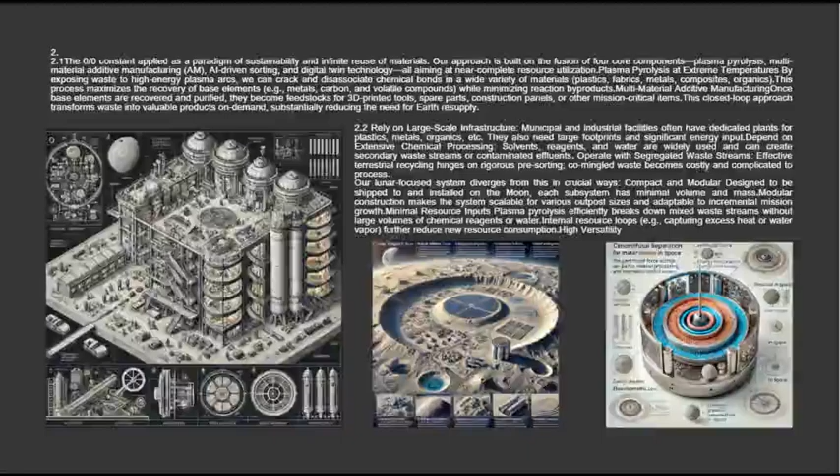terrestrial circular economies. In the long term, our zero/zero systems will revolutionize resource recovery by enabling scalability. Our modular design means that the system can be expanded or adapted to meet the needs of different missions, whether it's for a small lunar settlement or large-scale Earth-based recycling facilities.

Adaptability. The core technologies, advanced recycling, digital twin simulations, and AI-driven process optimization, can be tailored for various environments, ensuring efficient operation under extreme conditions, from the lunar surface to urban industrial settings.

Sustainability. By achieving nearly 100% material recovery and converting waste into valuable feedstocks and energy, our system reduces dependency on external resources and minimizes environmental impact.

Looking ahead, we are actively pursuing strategic partnerships with academic institutions, industry leaders, and government agencies. For instance, our collaboration with the University of Alabama will not only strengthen our research capabilities but also open up extended research opportunities, providing a robust platform for further innovation.

These partnerships will drive the continuous improvement of our recycling processes and support large-scale pilot projects on Earth, fostering sustainable practices that benefit communities and ecosystems.

Moreover, our solution has significant implications for both space exploration and Earth's environment. In space, it will enable self-sustaining habitats that reduce logistical constraints and support long-duration missions. On Earth, the technology can be adapted to manage municipal and industrial waste more effectively, promote energy efficiency, and create resilient, circular economies that conserve resources for future generations.

As we conclude, I want to reiterate that our zero-zero systems represent more than just a recycling solution. They embody a paradigm shift in how we view resource recovery and sustainability. By turning every fraction of waste into a valuable resource, we are setting the stage for a future where human ingenuity meets environmental stewardship in a truly transformative way.

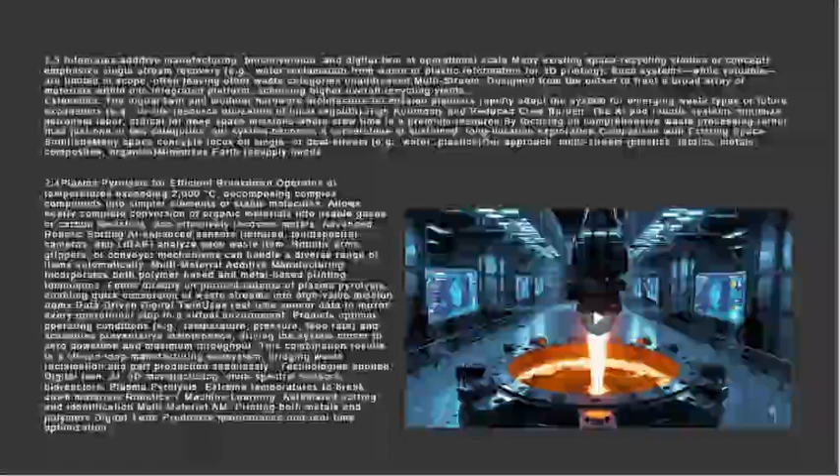Phase 1, Material Testing, months 1 to 6. During the first 6 months, our focus is on material testing and subsystem validation under simulated lunar conditions. Our key objectives are finalizing detailed CAD models and complete assembly drawings, conducting simulation analyses, finite element analysis, thermal modeling, to optimize design parameters, prototyping key subsystems, such as the bioreactor, thermal depolymerization reactor, and separation system, using Earth-based simulants.

Our success criteria for Phase 1 include achieving recycling efficiency targets of 99% or greater, maintaining system reliability with at least 95% uptime, and validating energy recovery that confirms our closed-loop concept.

Phase 2, Prototype Development, months 7 to 12. In Phase 2, we develop a fully integrated prototype. Our goals are fabricating custom components, advanced shredders, separation modules, and procuring off-the-shelf items, sensors, controllers.

Integrating individual modules, pre-sorting, fragmentation, separation, conversion, and energy recovery into a cohesive system in a laboratory environment. Conducting rigorous tests under simulated lunar conditions, vacuum, extreme temperatures, to ensure system coherence. Optimizing interfaces between modules to ensure smooth material flow and maximal energy efficiency.

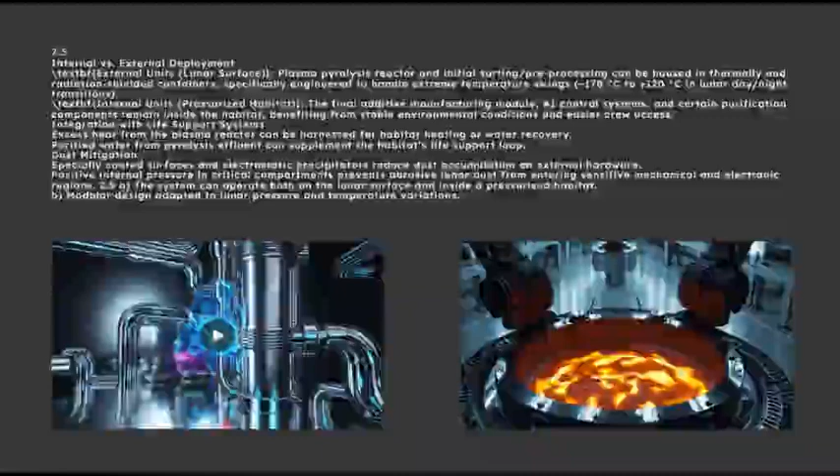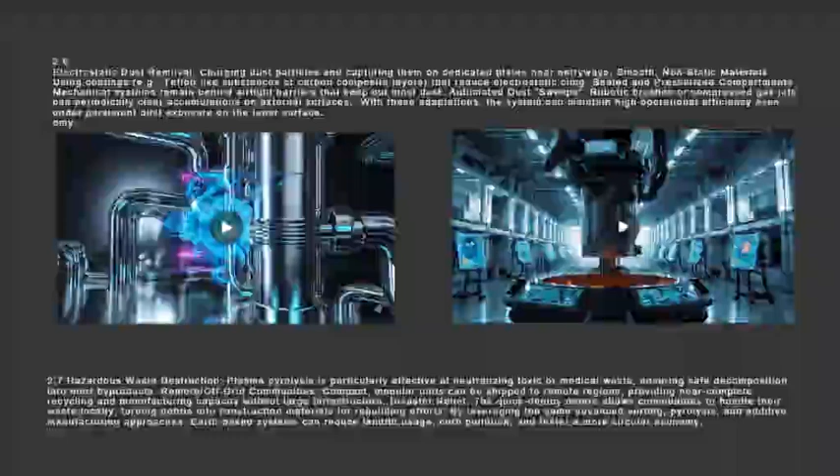Phase 3, full system testing and lunar deployment, months 13 to 24. Phase 3 involves full system testing and preparing for potential lunar deployment. Assembling a field-ready prototype designed to operate in a simulated lunar environment. Conducting extended tests in thermal vacuum chambers to simulate lunar conditions and monitor full-cycle performance over prolonged periods.

Documenting performance data, including recycling efficiency, energy balance, and system uptime, and refining our design accordingly. Developing a deployment strategy that outlines logistics, integration with lunar habitats, and operational plans.

Risk assessment and mitigation. We have identified key risks along with mitigation strategies. Thermal failure in reactors, high: use advanced heat-resistant materials and optimized cooling systems. Energy inefficiency, medium: optimized solar arrays, incorporate redundant energy storage, and apply adaptive control algorithms.

Integration of advanced modules, high: conduct thorough interface reviews, use standardized modular interfaces, and perform incremental integration tests. Component fabrication delays, medium: partner with multiple suppliers, include contingency time, and employ rapid prototyping.

System reliability under extreme conditions, medium: utilize thermal vacuum chambers for testing and simulate conditions using our digital twin. Crew interface and safety, medium: develop comprehensive SOPs, implement remote monitoring, and conduct regular training drills. Budget overruns, medium: allocate a contingency budget of 15 to 20% and secure additional funding through partnerships and grants.

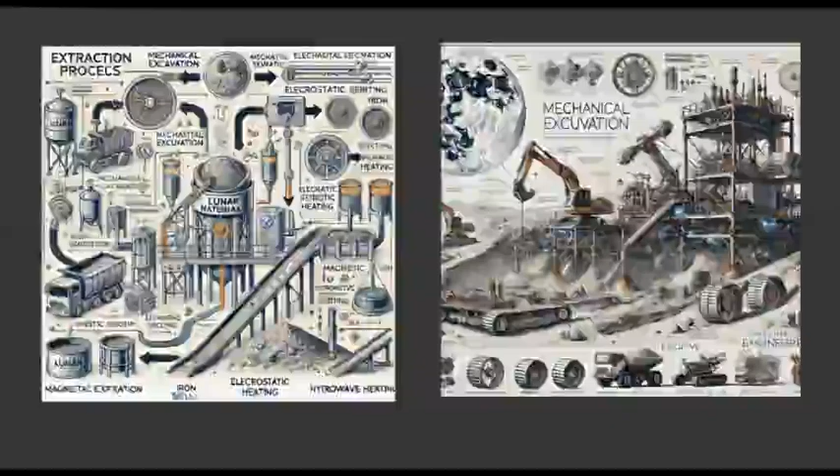Our digital twin and control system is the nerve center that provides real-time monitoring and adaptive control through AI-driven optimization. With a mass of around 100 kilograms and a volume of about 800,000 cubic centimeters, this system operates within 0 degrees Celsius to 50 degrees Celsius and 90 to 110 kilopascals. It dynamically adjusts processing parameters to ensure maximum efficiency across all modules.

Finally, the auxiliary systems, which include conveyors, safety enclosures, sensor mounts, and access panels, support material handling and facilitate maintenance. These systems weigh approximately 150 kilograms and occupy about 1 million cubic centimeters, operating under the same environmental conditions as the rest of the system. They enable easy modular integration and ensure that maintenance can be performed quickly, keeping the overall system operating seamlessly.

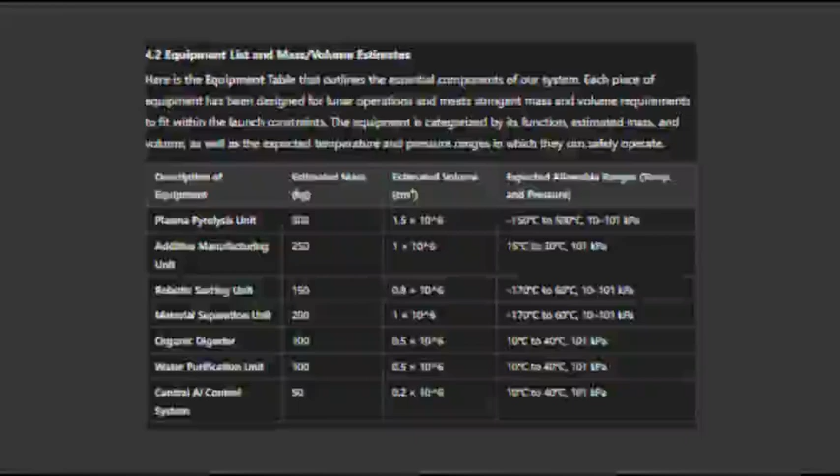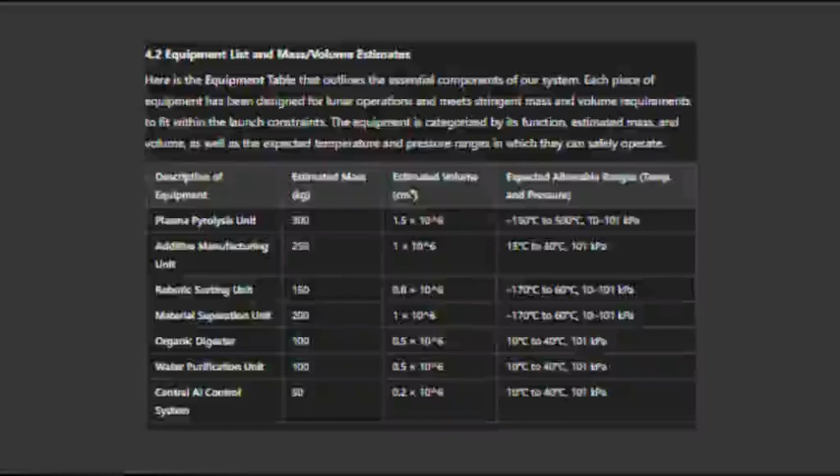In summary, our detailed CAD models, comprehensive equipment specifications, and modular design collectively ensure that every component supports our 0/0 system, where no resource is wasted. This robust hardware foundation is essential for creating a sustainable, self-sufficient lunar habitat.

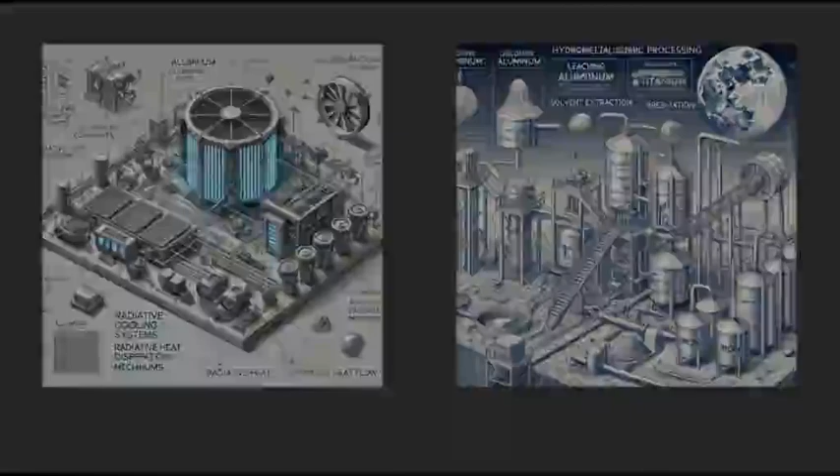Preliminary CAD models and key dimensions. Our CAD models provide an assembly-level view of the entire system. These models illustrate the spatial arrangement of our major modules: pre-sorting and identification unit, fragmentation and shredding module, separation and purification module, conversion and manufacturing module, energy recovery module, digital twin and control system. Each module is designed with precise dimensions to optimize space utilization and ensure smooth integration.

Walkthrough of the equipment list. Let's now review our equipment list, where we detail each major component's function, mass, volume, operating conditions, and integration features. Pre-sorting unit. Function: automates waste intake and material identification using sensors, XRF, Raman, and vision systems. Mass: approximately 150 kilograms. Volume: about 1,200,000 cubic centimeters.

Operating conditions: designed to operate within 0 degrees Celsius to 50 degrees Celsius and 90 to 110 kilopascals, fitting the controlled habitat environment. Integration: calibrated to reprocess 100% of incoming waste, which is crucial for maintaining our closed-loop 0 divided by 0 system.

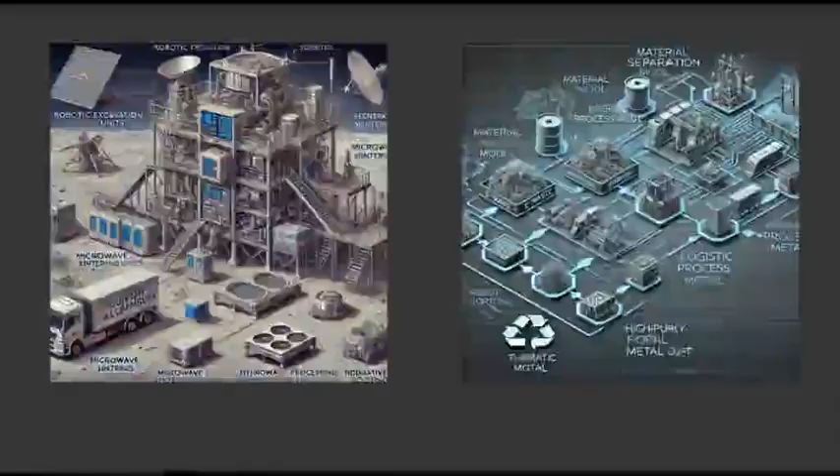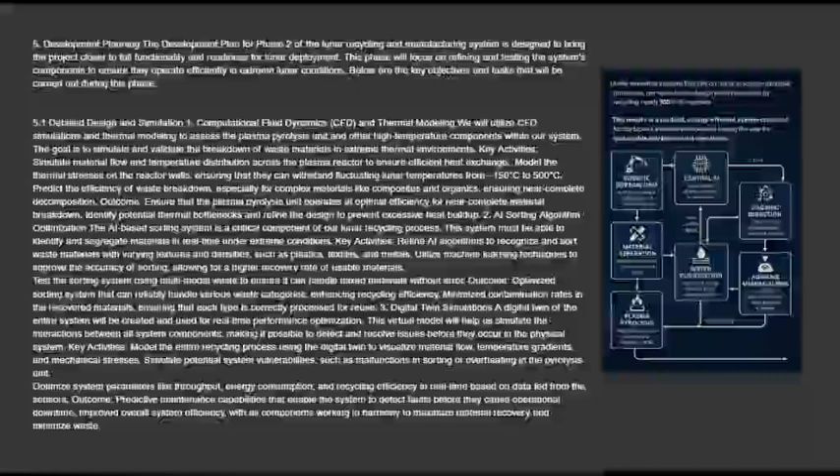Fragmentation and shredding module. Function: reduces waste to uniform particle sizes using high-torque shredders with carbide-tipped blades and vibratory screens. Mass: approximately 200 kilograms. Volume: around 1,800,000 cubic centimeters. Operating conditions: operates between 0 degrees Celsius and 60 degrees Celsius at 90 to 110 kilopascals, ensuring robust performance under varying conditions. Integration: provides consistent particle size, maximizing efficiency in downstream processes.

Separation and purification module. Function isolates different materials using magnetic separators, centrifugal systems, and multi-stage filtration. Mass approximately 300 kilograms, volume about 2,500,000 cubic centimeters. Operating conditions maintain a temperature range of 0 to 50 degrees Celsius and a pressure of 90 to 110 kilopascals. Integration: advanced purification reintroduces residuals back into the process, supporting full resource recovery.

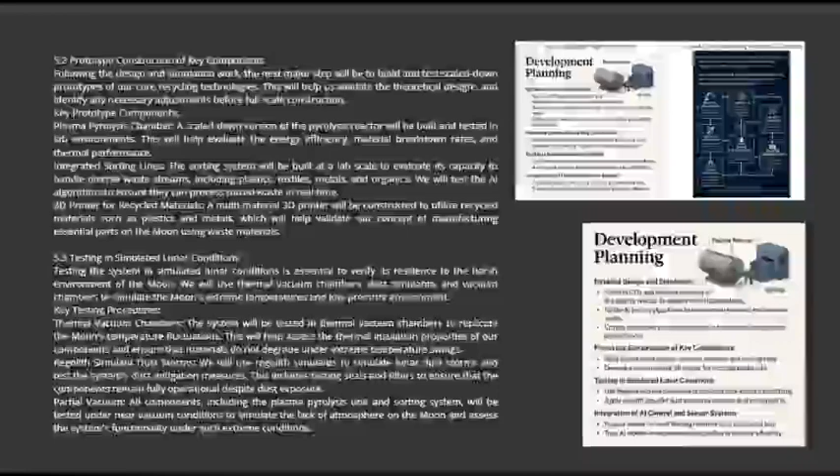Conversion and manufacturing module. Function transforms sorted waste into recycled pellets, ingots, or other feedstocks through processes such as extrusion, pyrolysis, and electrorefining. Mass approximately 350 kilograms, volume about 2,800,000 cubic centimeters. Operating conditions: the external housing operates between 0 and 50 degrees Celsius, while internal processing zones can reach up to 500 degrees Celsius with localized cooling and insulation. Integration: configured for near-zero byproduct loss, ensuring every output is reprocessed.

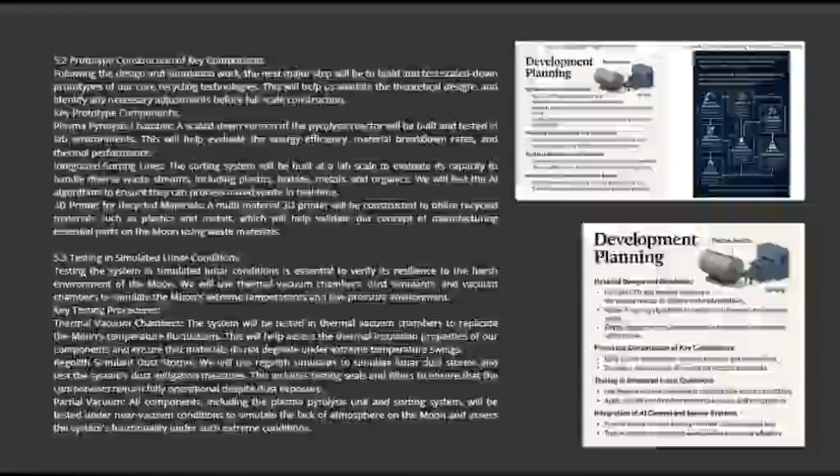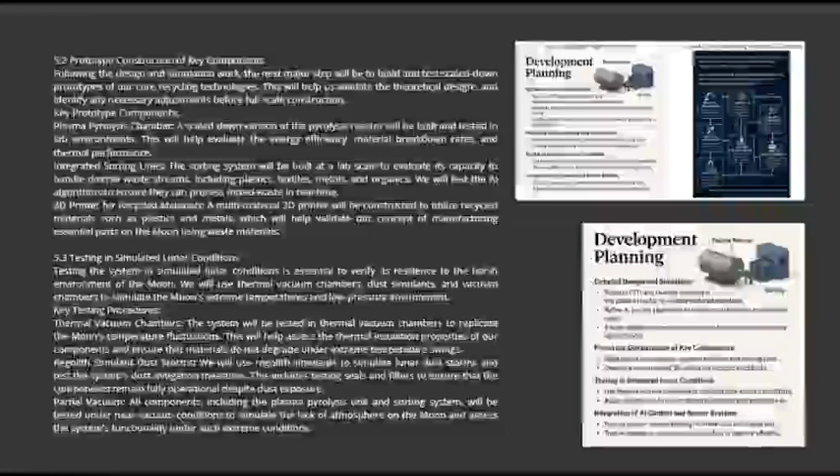Energy recovery module. Function captures residual thermal and chemical energy from processed byproducts and converts it to electrical power. Mass approximately 250 kilograms, volume around 1,500,000 cubic centimeters. Operating conditions: operates within 0 to 50 degrees Celsius at 90 to 110 kilopascals. Integration: reuses waste energy to support continuous operation, essential for a self-sustaining system.

Digital twin and control system. Function provides real-time monitoring and adaptive control via AI-driven optimization. Mass approximately 100 kilograms, volume about 800,000 cubic centimeters. Operating conditions designed for 0 to 50 degrees Celsius and 90 to 110 kilopascals. Integration ensures continuous adaptation of processing parameters to maintain efficiency.

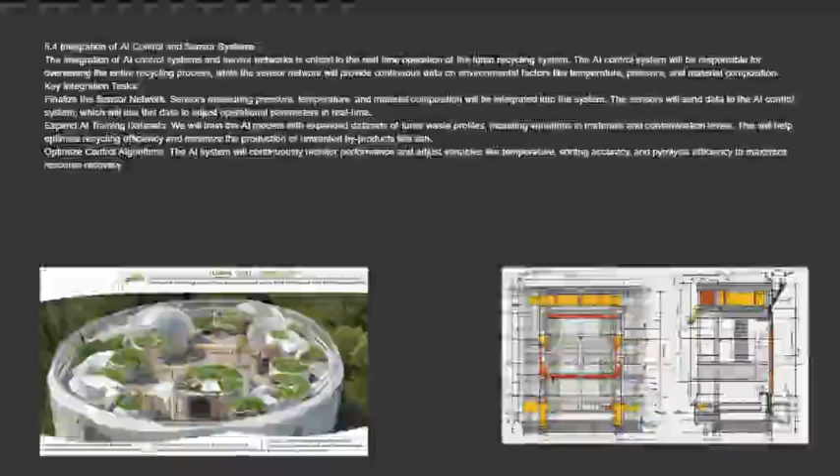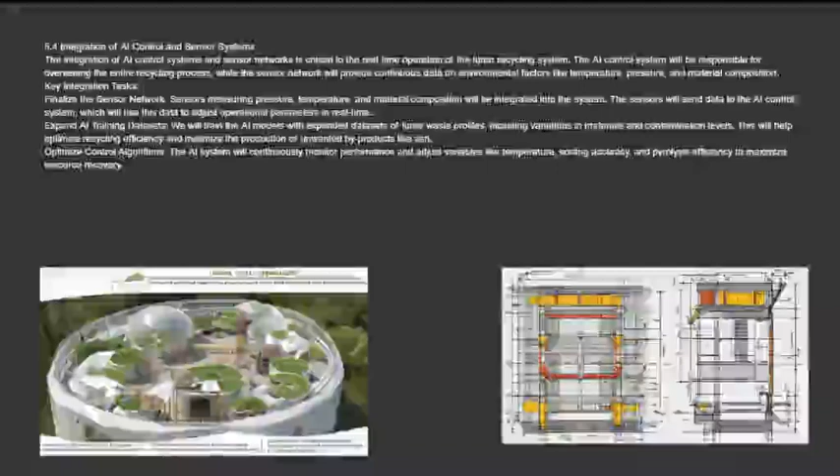Auxiliary systems. Function includes conveyors, safety enclosures, sensor mounts, and access panels to support material handling and maintenance. Mass approximately 150 kilograms, volume around 1 million cubic centimeters. Operating conditions operate within 0 to 50 degrees Celsius and 90 to 110 kilopascals. Integration facilitates modular integration and quick maintenance, ensuring overall system continuity.

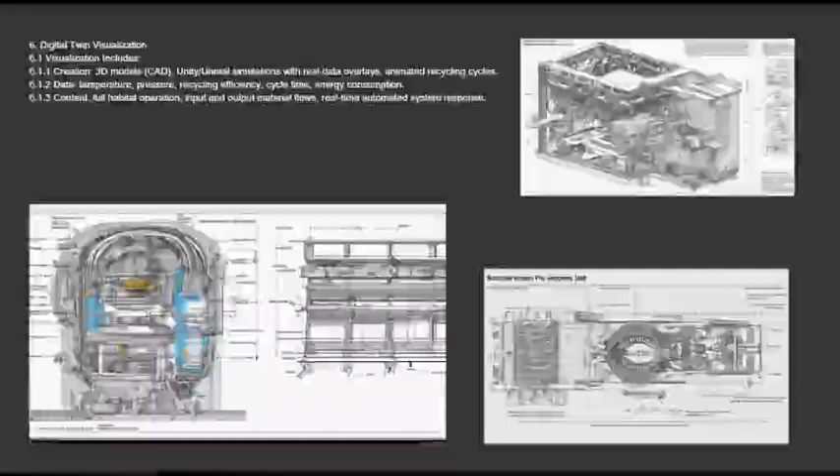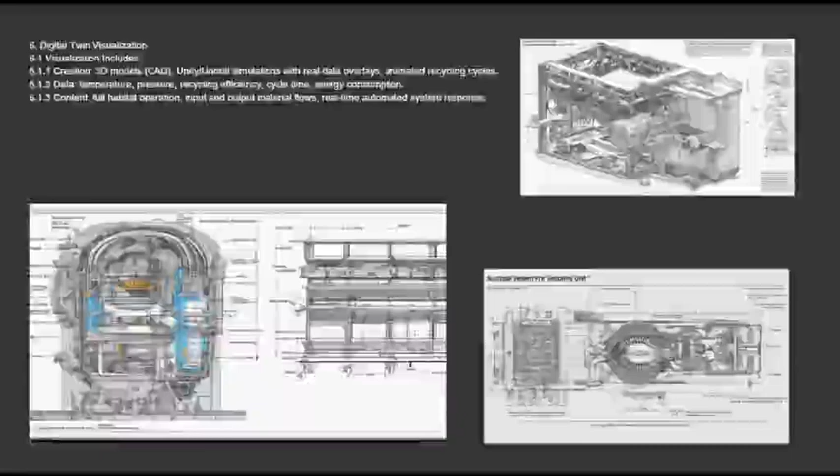Every component in our system is designed with the 0 divided by 0 principle in mind, ensuring zero waste and full resource recovery. Our design ensures that every fraction of material, even the smallest residue, is captured and reprocessed. The energy recovery module converts residual heat and chemical energy back into usable power. All modules are interconnected through our digital twin system, which dynamically monitors and adjusts operating conditions to optimize resource recovery.

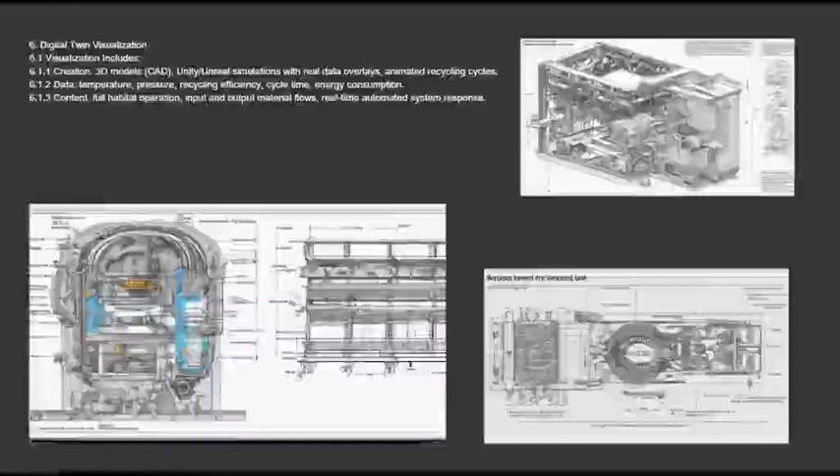In summary, our hardware and components are engineered for maximum efficiency, reliability, and adaptability under lunar conditions. The detailed CAD models, comprehensive equipment specifications, and modular design not only maximize material recovery but also embody our zero-waste philosophy, ensuring every bit of waste is repurposed. This approach is critical to creating a sustainable, self-sustaining lunar habitat.

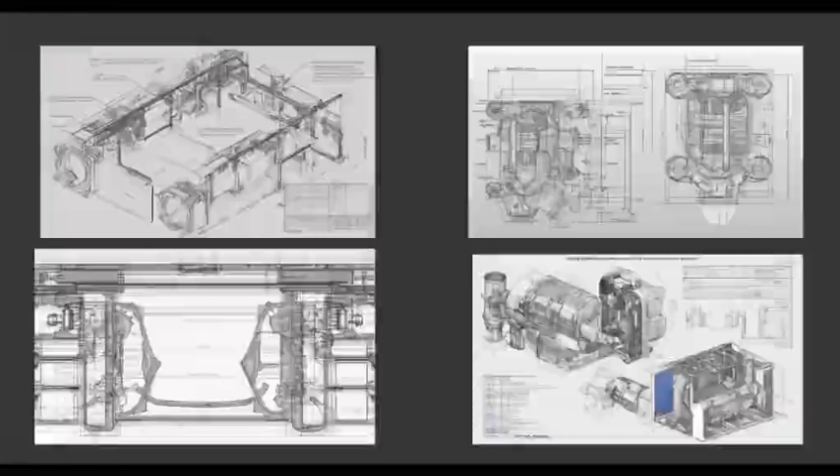For textiles, hydrothermal processes, possibly combined with enzymatic treatment, recover fibers which are then reconstituted into new materials. For metals, electrorefining and thermal treatments purify metal scrap into high-quality ingots. For composites, mechanical and thermal methods separate composite materials into fibers and resin fractions.

Step 5, Finishing and Output Collection. Finally, in the finishing and output collection stage, the processed materials are collected and sorted. The outputs, recycled polymer pellets, reprocessed fibers, metal ingots, and composite feedstocks, are then directed to storage areas or prepared for direct application in manufacturing new components for the lunar habitat.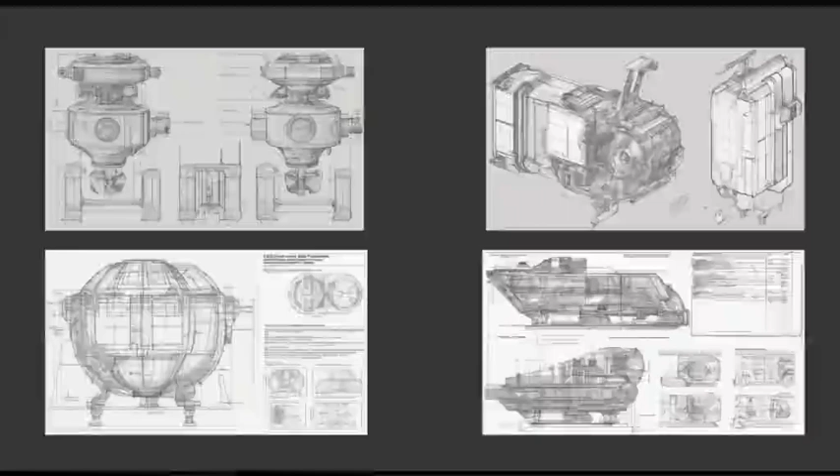The animation on screen demonstrates the organized flow of outputs from the conversion module into storage or assembly lines. This stage is allocated a 10-minute segment, completing the full production cycle.

Cycle overview, daily throughput, and crew involvement. To summarize, each full production cycle takes approximately 1 hour. Given our design, we estimate a daily throughput of 500 kilograms of plastics, 150 kilograms of textiles, 200 kilograms of metals, 100 kilograms of composites, allowing for 8 to 10 complete cycles per day.

Our system is designed for minimal crew involvement. Routine operations, such as waste loading and system monitoring, are managed remotely via our digital twin dashboards, ensuring that only essential manual interventions, such as periodic inspections or maintenance, are required. Typically, only 1 to 2 crew members are needed per 8-hour shift, dedicating about 1 to 2 hours per shift to operational supervision and an additional 1 to 2 hours to maintenance.

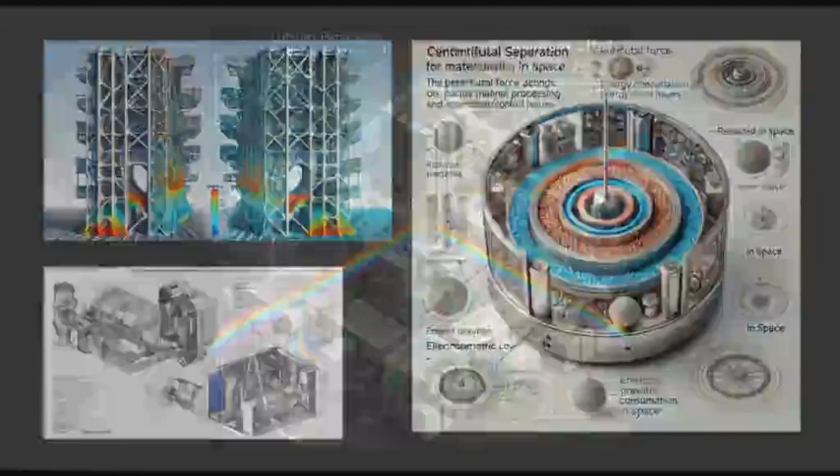In conclusion, our concept of operations is engineered to be efficient, fully automated, and scalable. The integration of precise waste sorting, uniform fragmentation, efficient separation, tailored conversion processes, and organized output collection creates a robust, continuous production cycle. This cycle not only achieves near 100% recycling efficiency but also minimizes resource usage and crew involvement, making it ideally suited for sustainable lunar habitation.

Introduction to Integrated Recycling Modules. Now, let's explore the integrated recycling modules that form the backbone of our system. Each module is designed to operate autonomously yet in synergy with the others, ensuring that every fraction of lunar waste is efficiently processed into usable materials. I will walk you through each module, highlighting its key functions, components, and how they interact within the closed-loop system. On screen, you'll see detailed CAD renderings and animations that illustrate these interactions.

Pre-sorting and Identification Unit. First, the pre-sorting and identification unit is our system's entry point for waste. This module performs the crucial task of accurately categorizing incoming waste. It is equipped with an array of high-precision sensors, including X-ray fluorescence (XRF) spectrometers to analyze elemental composition, Raman spectrometers for identifying molecular structures, and vision systems utilizing high-resolution cameras and advanced image recognition software to visually classify materials.

This unit employs a conveyor-based or robotic intake mechanism that directs waste into designated bins based on its type and contamination level. The system is calibrated to ensure even the smallest fractions of waste are detected and sorted.

As you watch the animation on screen, notice how sensor data is integrated in real time into our digital twin model, enabling immediate feedback and dynamic adjustments to the sorting process. This ensures that our downstream processes receive clean, well-categorized material, which is critical for achieving near 100% recycling efficiency.